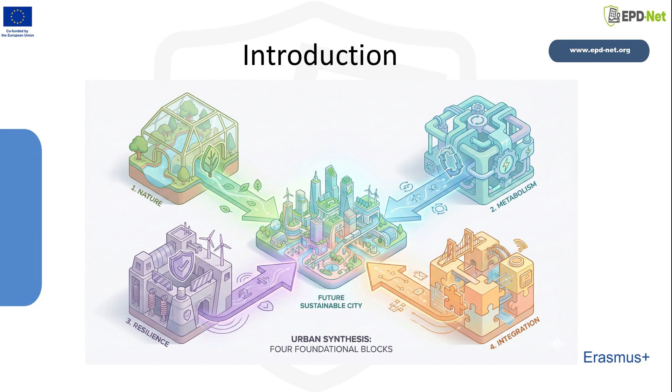Nature-based planning builds upon the conceptual foundations established by McHarg but updates them for a world facing climate extremes, biodiversity collapse, and increasingly complex social needs. It is an approach grounded in nature-based solutions, NBS, which leverage ecosystem functions to address societal challenges. NBS are inherently multifunctional. A single project, such as a restored river corridor, can reduce flood risk, enhance biodiversity, improve microclimate, provide recreation, encourage walking and cycling, and support cultural heritage. This multifunctionality is essential in urban environments where space is limited and land use pressures are high.

Nature-based planning requires planners to think in systems, recognizing that land, water, vegetation, climate, and community well-being are interdependent. It demands collaboration across sectors, urban planning, landscape architecture, ecology, hydrology, transportation, and public health, and challenges governance structures that divide responsibilities into isolated silos. Although nature-based planning has strong scientific grounding, its implementation requires institutional commitment, policy alignment, and participatory governance to overcome administrative fragmentation and ensure long-term maintenance. When these conditions are met, nature-based actions can significantly enhance urban resilience and quality of life.

The importance of nature in cities extends far beyond aesthetics. Research in environmental psychology, neuroscience, and public health shows that humans have a deep biological need for contact with nature. This concept, biophilia, suggests that our physical and cognitive systems are adapted to environments rich in natural stimuli such as vegetation, water, natural light, and biodiversity. Urban environments, however, often replace these stimuli with artificial materials, monotonous forms, and overstimulating sensory conditions.

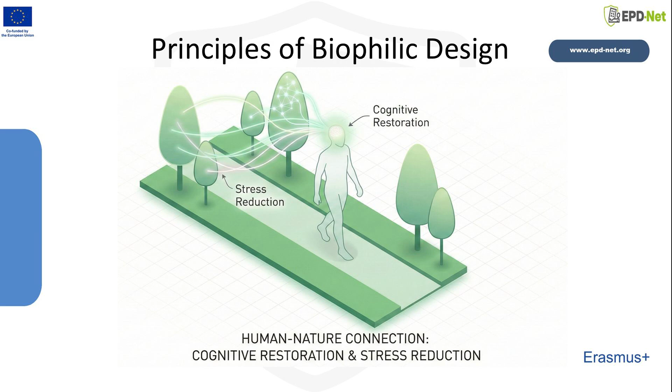Biophilic design aligns naturally with regenerative thinking, encouraging interventions that enhance ecological health rather than depleting it. When effectively implemented, biophilic environments can improve air quality, enhance acoustic comfort, reduce stress, increase productivity, support inclusive design, and promote a stronger sense of belonging and community.

Biophilic design is operationalized through a set of 14 patterns classified into 3 groups: nature in the space, natural analogs, and nature of the space. These patterns describe how specific design elements support human psychological and physiological benefits. Nature in the space includes direct connections to elements such as vegetation, water, animals, natural light, and fresh air. Natural analogs encompass designs that reference natural forms or processes through biomorphic patterns, natural materials, or organic shapes.

Nature of the space addresses spatial configurations that align with human evolutionary preferences, such as prospect: expansive views; refuge: protected zones; mystery: partially obscured views that invite exploration; and risk/peril: controlled exposure to challenge or excitement. Although these patterns are well documented, they are not equally represented in practice. Institutional preferences and safety requirements often favor predictable, low-risk designs, making patterns like mystery or risk less common.

Nevertheless, each pattern offers valuable insights into how built environments can evoke emotional responses, stimulate curiosity, and restore cognitive balance. When applied thoughtfully, these patterns help designers create rich, multi-sensory environments that mirror the complexity and dynamism of natural ecosystems. Human interactions with nature in urban contexts involve more than passive observation. They are fundamentally multi-sensory and experiential.

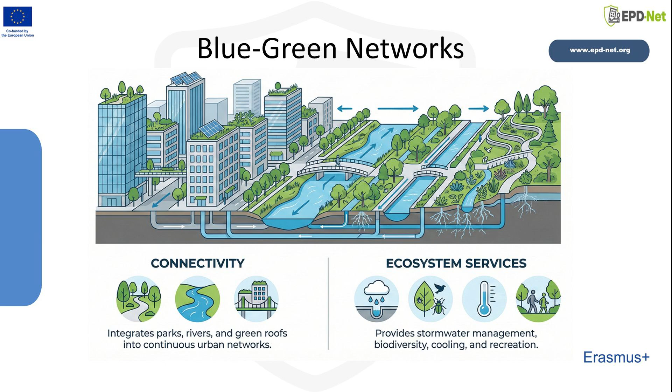Blue-green infrastructure consists of a combination of natural, semi-natural, and engineered systems designed to deliver environmental and social benefits. Green elements include parks, forests, street trees, meadows, ecological corridors, green roofs, and living walls. Blue elements consist of rivers, lakes, wetlands, ponds, and engineered water systems like retention basins and constructed wetlands.

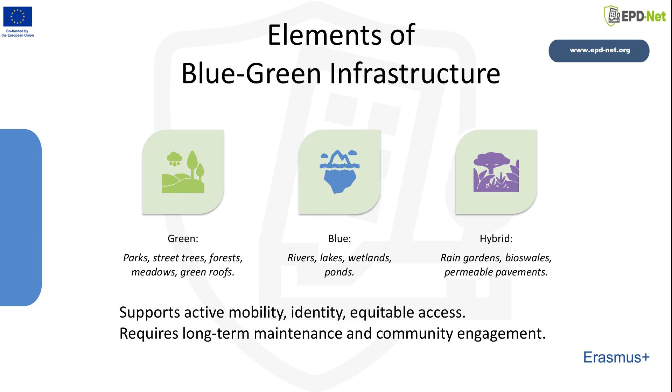Hybrid systems, such as rain gardens, bioswales, permeable pavements, and detention landscapes, are particularly valuable because they manage stormwater while providing ecological functions and social amenities. Designing effective BGI requires understanding hydrological cycles, soil permeability, vegetation suitability, and microclimatic dynamics. It also requires careful spatial planning to ensure that elements are connected and accessible.

Well-designed BGI supports active mobility by integrating with pedestrian and cycling networks, enhances neighborhood identity, and contributes to equitable access to ecosystem services. Importantly, maintenance and long-term monitoring are integral to BGI success, requiring interdisciplinary coordination and strong community engagement.

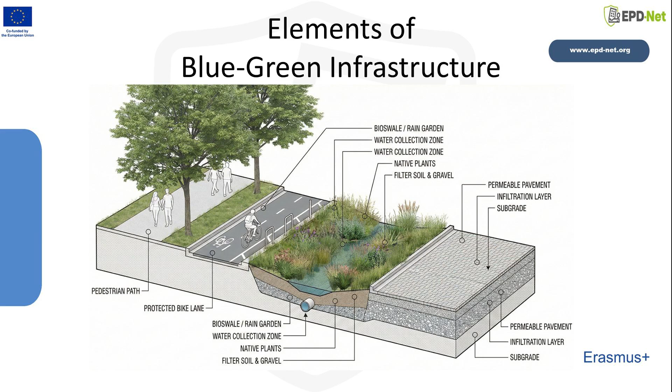Connected blue-green infrastructure provides a wide array of benefits across social, environmental, and economic domains. Hydrologically, BGI reduces flood risk by slowing, absorbing, and filtering stormwater, lowering pressure on gray infrastructure and decreasing sewer overflow events. Vegetation cools urban areas through evapotranspiration, mitigating the urban heat island effect and protecting vulnerable populations during heat waves.

Ecologically, connected BGI creates habitats for pollinators, birds, and other wildlife, increasing biodiversity and strengthening ecological resilience. Socially, BGI offers accessible recreational areas, improves neighborhood aesthetics, and supports mental and physical health. Economically, it can reduce energy consumption, raise property values, and generate long-term savings by limiting costly gray infrastructure upgrades. Overall, blue-green networks act as urban insurance, helping cities manage climate risks while creating healthy, vibrant environments.

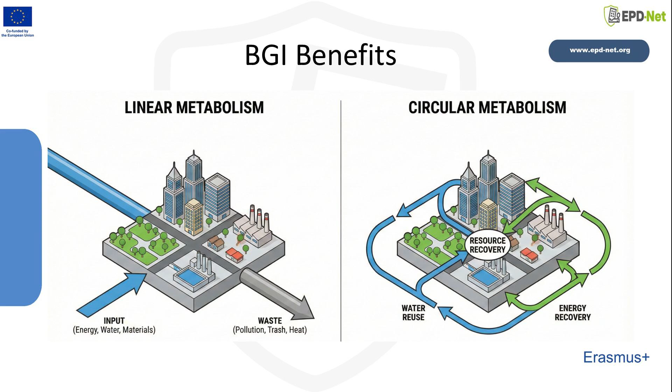Urban metabolism conceptualizes cities as living systems that consume, circulate, and produce resources. These flows include energy, water, food, building materials, goods, and waste. In this metabolic metaphor, cities operate as organisms whose internal processes shape environmental performance. Developed in the mid-20th century to quantify resource inputs and outputs, it now serves as a key framework for evaluating sustainability at municipal and regional scales.

It identifies where energy is lost, where materials accumulate, and how waste streams can be reused, supporting transitions toward circular economies. It also strengthens nature-based planning by exposing the limitations of linear systems and revealing regenerative opportunities. For example, organic waste can become compost for urban agriculture, stormwater can be captured and reused, and excess industrial heat can supply district heating. Understanding urban metabolism enables planners to design cities aligned with natural cycles rather than disrupting them.

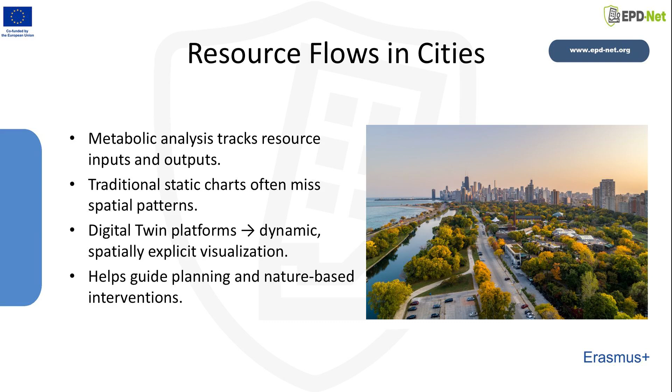Understanding the flows of energy, materials, and water is essential for interpreting how cities function within an urban metabolism framework. Metabolic analysis tracks these resource inputs and outputs through a systematic accounting process, helping us see where consumption is concentrated and how it shapes a city's environmental footprint. However, traditional ways of presenting metabolic data, often through static charts or simplified diagrams, rarely reveal the spatial patterns behind these flows. This limits their usefulness for planners who need to understand where resource pressures occur in order to design effective interventions.

To address this gap, urban metabolism models are increasingly being linked with digital twin platforms. Digital twins provide a dynamic, spatially explicit environment that allows metabolic data to be visualized, monitored, and tested in real time. This integration turns abstract resource accounting into a practical tool for guiding urban planning and design decisions, and it forms a natural bridge to the following discussion on how nature-based systems support urban resilience.

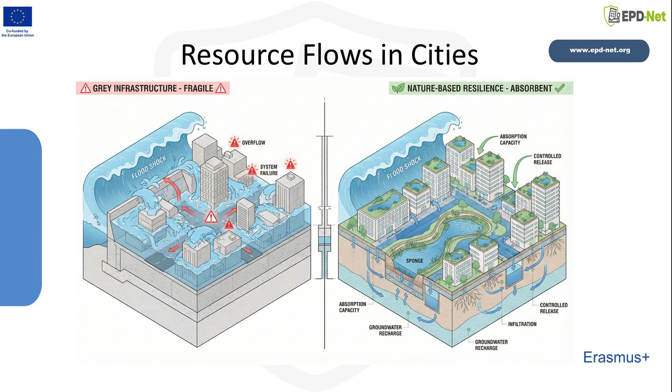Urban resilience refers to a city's capacity to withstand shocks, such as floods, heat waves, or economic disruptions, and to adapt or transform in response to long-term stressors. Nature-based design plays a crucial role in building resilience because natural systems inherently provide redundancy, flexibility, and adaptive capacity. For example, wetlands store and filter stormwater more effectively than rigid drainage systems, and vegetation offers cooling benefits without energy input.

Blue-green infrastructure reduces vulnerability to climate extremes by integrating ecological processes into urban systems, making cities more adaptable and less dependent on mechanical solutions. Social resilience also gains from nature-based design.

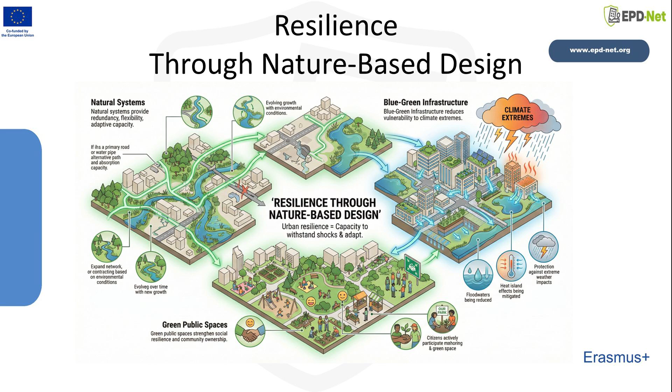Green public spaces support community cohesion, which is vital for mutual aid during crises. When paired with participatory planning and transparent governance, nature-based strategies foster place attachment and community ownership. Ultimately, nature-based resilience is not only about reacting to hazards but creating adaptive systems that improve over time, aligning closely with regenerative principles that restore ecological health while supporting social well-being.

Integrating ecology into urban form requires a multi-scalar and interdisciplinary approach. At the regional scale, planners must consider larger ecological networks, such as river basins, watersheds, and wildlife corridors, and ensure that development does not disrupt these systems. At the city scale, this involves designing street networks, open spaces, and infrastructure that maintain ecological flow and connectivity.

At the site scale, ecological integration requires careful design of vegetation, soil systems, hydrology, microclimate, and human use patterns. Achieving this integration demands collaboration among ecologists, landscape architects, hydrologists, transportation engineers, and social scientists.

Digital tools such as geodesign and parametric modeling allow testing of alternative scenarios, prediction of ecological outcomes, and optimization of spatial configurations. Equally important is community participation, which helps define local ecological priorities, ensures design suitability, and supports long-term stewardship. When ecology is fully embedded in urban form, cities become more adaptable, livable, and resilient.

Nature-inclusive design appears not only in large-scale projects but also in everyday urban interventions. Green roofs and living walls improve thermal performance, enhance biodiversity, and support stormwater management. Street trees shade pedestrian paths, improve comfort, reduce energy demand, and create ecological corridors. Rain gardens and bioswales manage runoff, filter pollutants, and strengthen soil health.

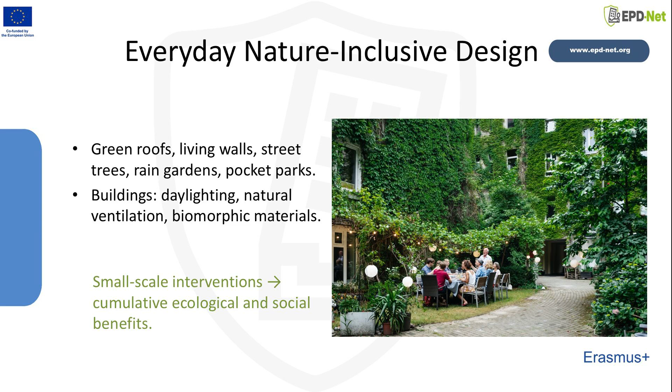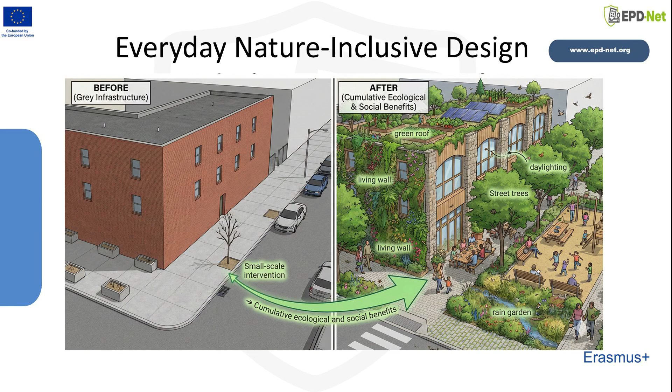Pocket parks and community gardens provide accessible nature within walking distance, especially important in dense neighborhoods. Buildings designed with daylighting, natural ventilation, and biomorphic materials create healthier indoor environments. These small-scale examples, when implemented across a city, contribute to a cumulative effect, expanding ecological functions, enhancing urban aesthetics, and improving well-being for residents. They demonstrate that nature-based design is not limited to flagship projects but can be embedded in everyday life.

Vienna offers a leading example of how a city can institutionalize blue-green infrastructure within an urban policy framework. The Vienna Green and Blue Infrastructure Strategy integrates nature-based design into the city's climate adaptation plan, urban development guidelines, and mobility strategies. The city promotes green roofs, living facades, permeable surfaces, urban tree networks, and river restoration.

These interventions have measurable impacts. They reduce urban temperatures, lower energy demand, and improve stormwater management. The strategy demonstrates that integrated ecological planning generates economic benefits, including lower maintenance costs and increased property value.

Vienna's approach is highly participatory. Community engagement and multi-stakeholder governance ensure that interventions suit local needs. The Vienna model shows that BGI becomes most effective when embedded into planning regulations and supported by long-term political commitment.

Following the 2010-2011 earthquakes, Christchurch used ecological principles to guide urban recovery. The Central Recovery Plan introduced the Frame, a network of green spaces encircling the central business district, designed to provide flexibility for future land use, enhance public space, and support ecological connectivity. The restoration of the Avon River corridor is a central component of the plan, integrating rain gardens, bioswales, and native plantings to improve flood resilience and ecological health.

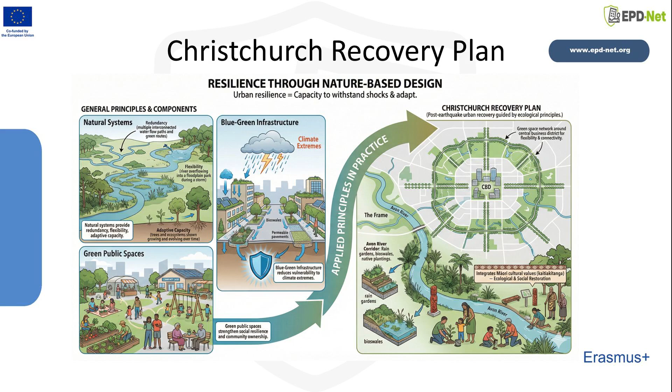Importantly, the plan respects and integrates Maori cultural values, particularly Kaitiakitanga, the principle of environmental guardianship. This cultural foundation ensures that restoration is not only ecological but also social and spiritual. Christchurch demonstrates how nature-based planning can support post-disaster recovery by enhancing resilience, restoring ecological systems, and strengthening community identity.

In summary, designing with nature shifts urban planning toward using natural systems as active partners in creating resilient, healthy, and equitable cities. This lecture introduced biophilic design, blue-green infrastructure, and urban metabolism, showing how they work together as a cohesive nature-based planning strategy. We highlighted the value of human-nature connection, multifunctional infrastructure, and embedding ecological thinking into urban form.

International examples such as Vienna and Christchurch demonstrate that nature-based design is practical and effective when supported by strong policy and community involvement. Ultimately, designing with nature is both an environmental and social commitment. In the next topics of this module, we will explore nature-based solutions in greater depth and examine how these ideas are applied in real urban contexts.